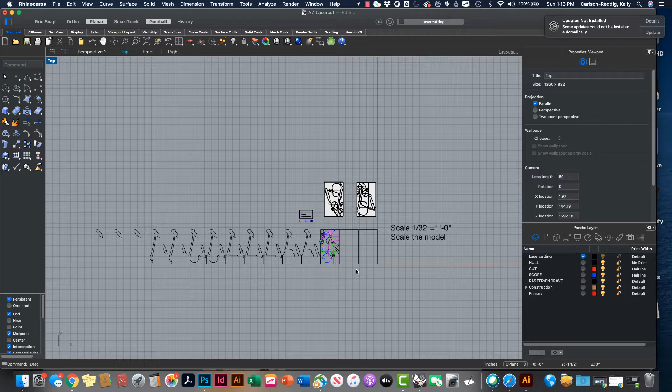So just a couple of things to keep in mind as you are preparing your files for the laser cutter. The first is that we're going to use the contour command in order to create a set of slices through our model.

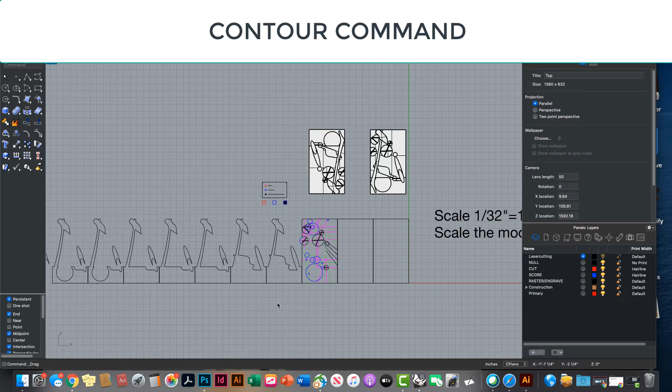And we want those slices to be at 1/8 of an inch, or what is equivalent to 1/8 of an inch, at the 1/32nd of an inch scale. So if you were working with your models when they are still 300 feet long, you're going to offset those by 4 feet.

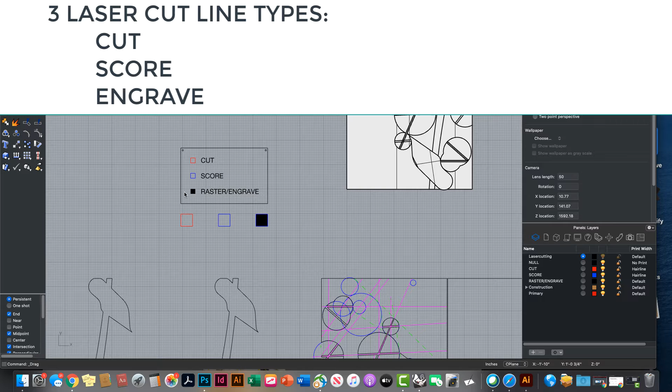In preparing these files, we're going to want to place the lines on one of 3 layers: the cut, the score, or the raster/engrave layers. I am going to primarily be using the cut tool to cut the profiles.

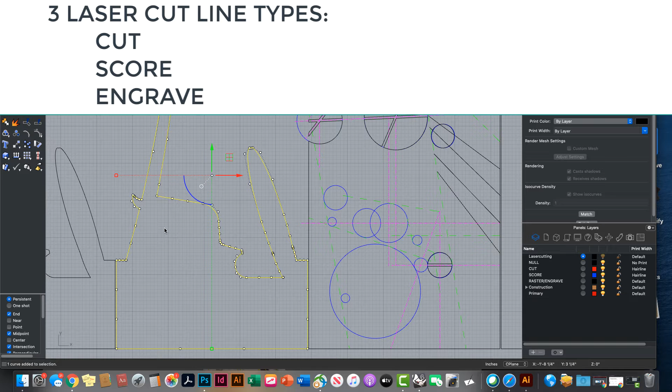I've prepared all of the profiles, and I've also offset them just the littlest bit. It's not really worth the time it takes to set them exactly next to each other and then have to remove the different lines. Also this way you can set up each of these profiles as a line, and the laser cutter will work much more efficiently.

So those will be my cut lines. And then I would like for you to create one image using the raster/engrave hatching. So that's how you're going to prepare this.

We also need to scale. If you are still at a 300-foot long site, we're going to need to scale it twice. If you think about it, the scale 1/32nd of an inch equals 1 foot 0 inches. We're in 2 different units there: inches and feet.

And so you could scale using a 32nd, right? But that would still only get you to an inch equals a foot. So in essence, you're having to scale twice.

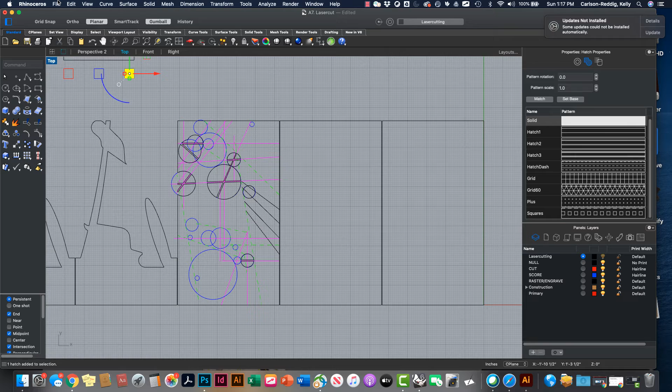You can either scale at the equivalent of 32 times 12, or you can scale 1/32nd and then scale the 1/12. The other way to do it, which is a little bit of a shortcut, is right now our model units are in feet, and if I simply change into inches, it will give me the option to scale.

And if I refuse that scale, it will actually shrink my objects. Everything that was 1 foot will become 1 inch. So my 300 feet become 300 inches, and then I can simply divide that by 32. So I hope that that's clear.

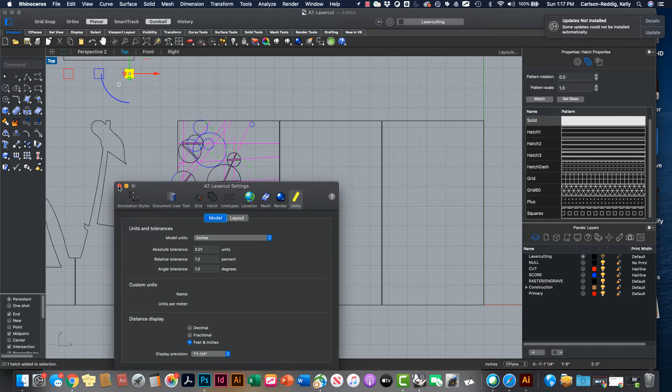So in any case, I would like for you to have some lines that are scored, some lines that are engraved, and some lines that are cut in your laser cut model.

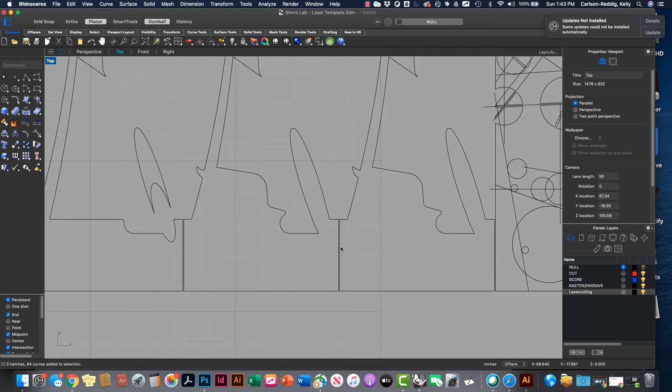For clarity, I just kept all of these objects in position, but I do want you to see I've left a space between all of them. So even though there's a little bit of material waste, hardly any, we can have 2 clean lines right next to each other, and it'll be a little bit easier to edit ultimately all of these layers.

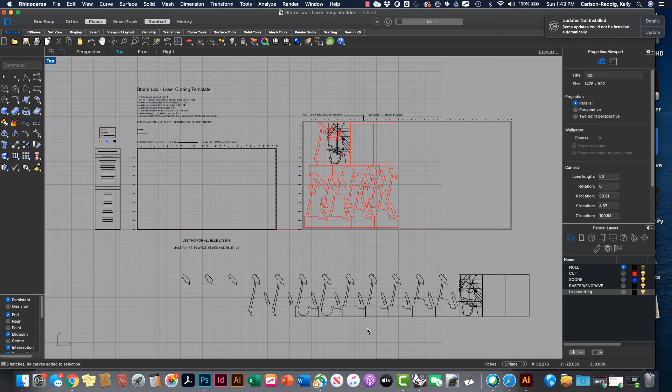You'll want to open up the SOA template, and I've given you the link in the assignment. We have 2 different sizes of laser cutters. Given the size of our pieces and the size of the board which I've gotten for you, you will want to use the larger of the 2 laser cutters.

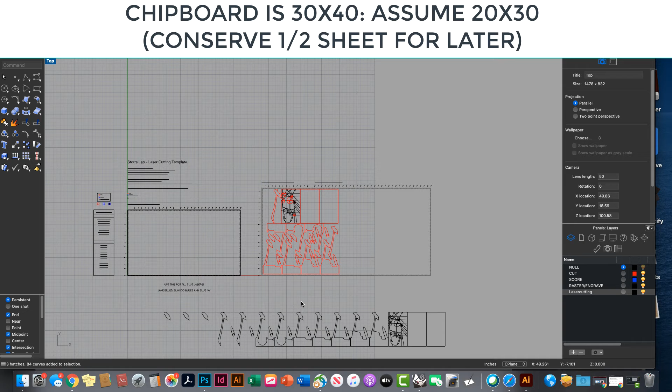But as you go in and adjust your pieces, you can lay them out so that you really don't end up needing the entire bed. You can make good, efficient use of your piece of cardboard. So I'm going to check the size of that chipboard for you, and I'll put that in the assignment.

You'll see I've kept some of my objects sort of in line, and I've rotated others. You don't want to flip them. Actually, I guess it's probably not a big deal if you do, but you can sort of easily utilize the space in between.

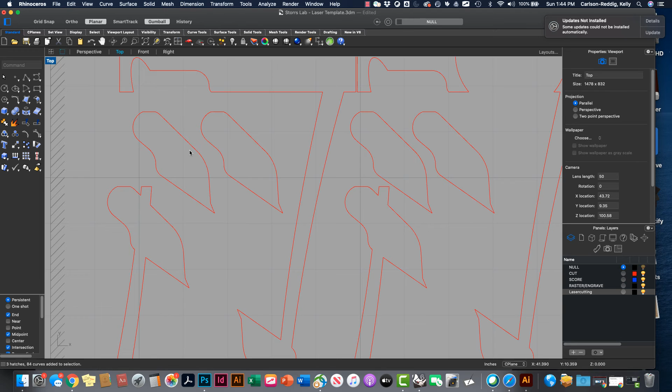I need several figures of this shape, several editions, so I've just kind of put them in where I could fit them, and I have this convenient nesting of these 2 figures, so that worked pretty well.

And I do have the data split onto a cut layer and the raster engrave layer so that I can register the map on my last kind of flat contour and keep that drawing.

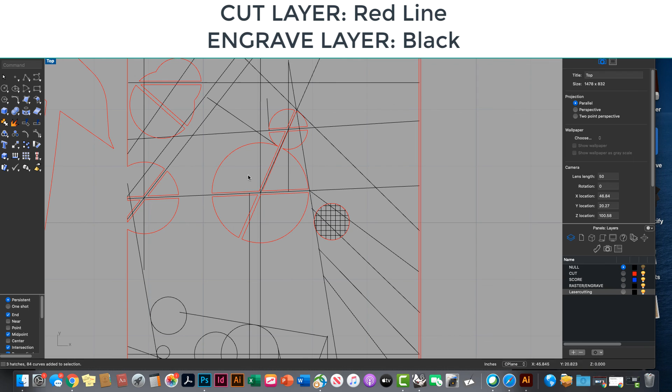And you'll also see that on that layer, I'm going to cut through. I'll have some holes, and where this falls out, I will not have that line, but it will pick up again on the other side of that hole. You'll see I have a combination of holes cut through and pattern essentially etched on top.